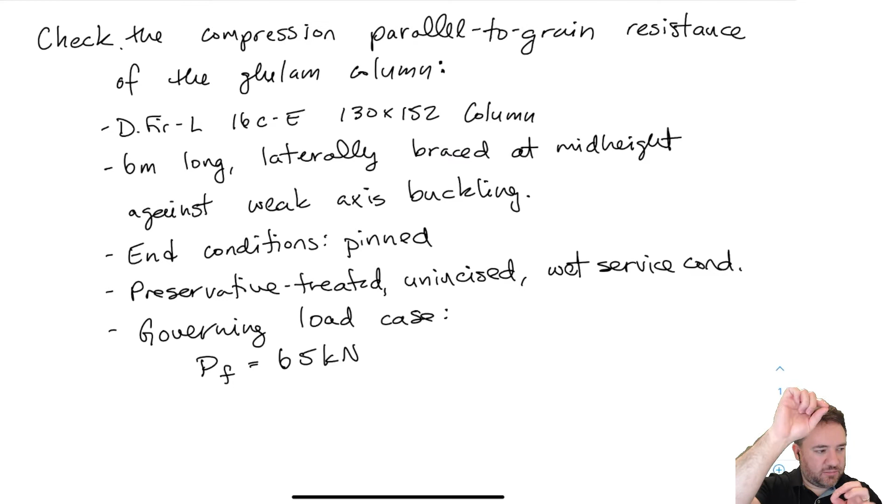All the data is here, but what exactly we're going to be looking at: we are given basically the column geometry, the column species, and the column grade. We have a 6 meter long column, and at the middle of that column it's laterally braced in one direction. That means there's some beams maybe framing into this column, preventing the column from buckling at that location, just in the center. At the ends of the column we have pins, so the column can rotate in both directions. That probably just means we have some kind of regular bolted connection at the ends.

This is the most common end condition that we see in timber members. And this column is outside or in a humid area, so it's preservative treated, unincised, and it has a wet service condition. We're given the governing load case, which is 65 kilonewtons, and this load case includes dead, live, and snow loads. We need to know that because we need to know what kind of KD factor that we're going to use. And we are tasked to predict what is going to be the strength of this and whether that strength is going to be okay given the factored load that we are provided.

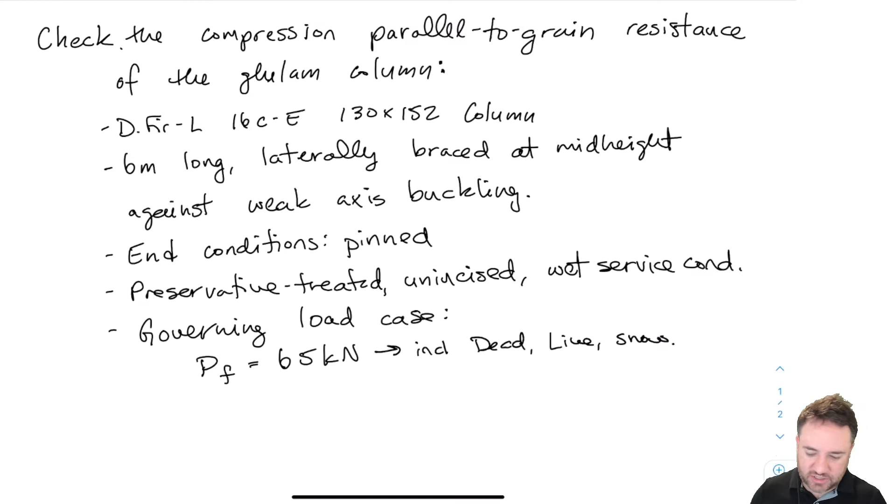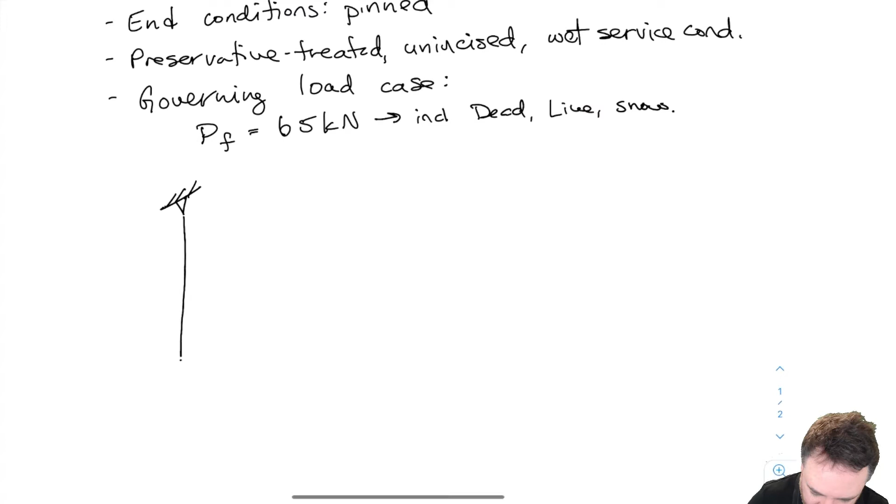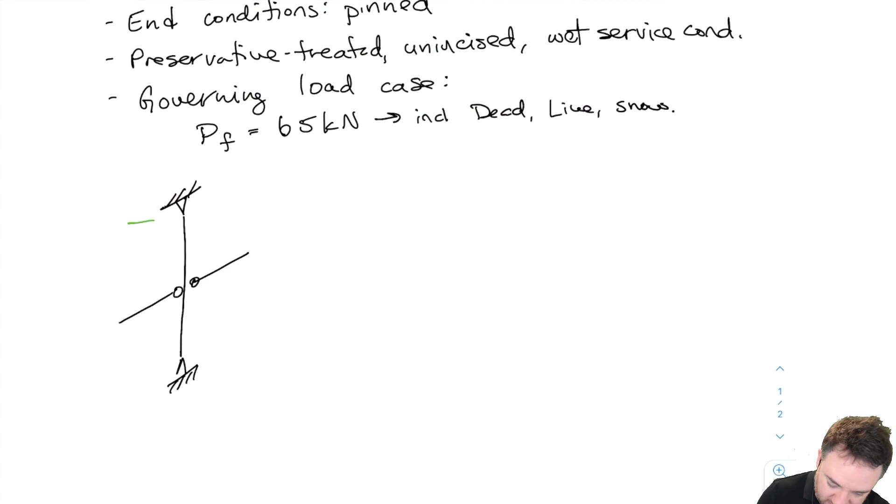Okay, so let's start by just drawing what this column looks like. As we said, we have a pin end at the top, we have our column, we have a pin end at the bottom, and then in the weak axis direction, which we'll look at when I draw a section to show what we're talking about, we have some kind of bracing preventing the column from buckling in that direction. This is a 6 meter long column, so basically we have 3 meters at the top, 3,000 millimeters here, and then another 3,000 to get to the bottom.

These are going to define our lengths for buckling in two directions. In the weak axis direction, our buckling length is going to be 3,000. And it turns out that our effective length is also going to be 3,000 because the K is going to equal 1 for that case. For the strong axis direction, our effective length is going to be 6,000 because the K is also 1 for that case, since it's pin-pin.

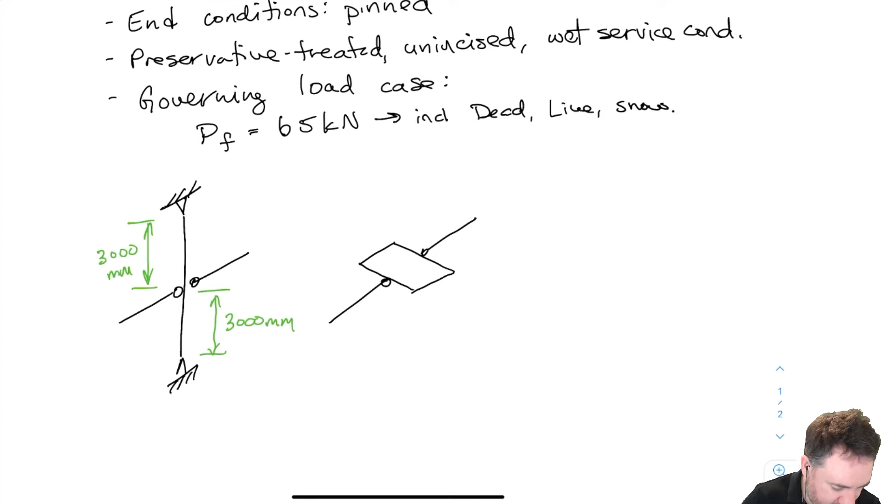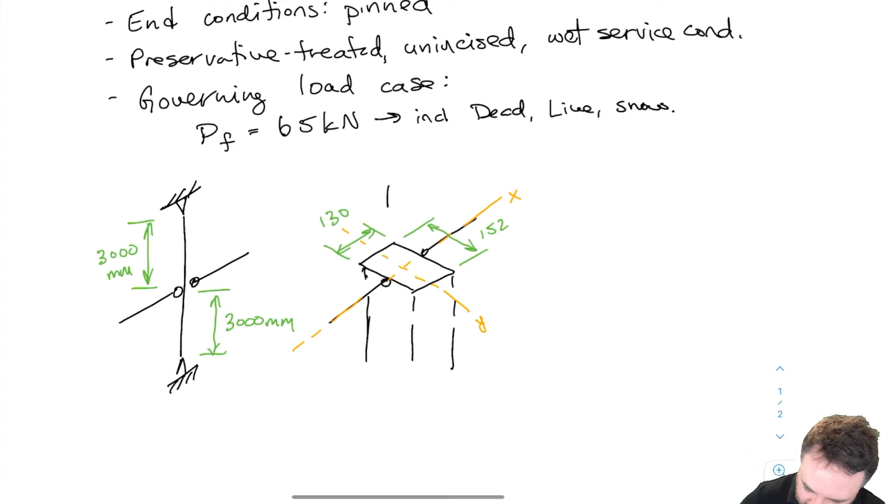So if I were to look at the cross section of this column, looking from above, or the cut section in 3D, it's going to look something like this. That is the cross section, oriented the same as I've oriented the column on the left. Here we have the bracing for the weak axis direction. If I were to label those axes, I might call this weak axis direction Y, and buckling about Y, and this direction X. But really, I'm just going to refer to these as weak axis and strong axis because I think that's probably clearer. We also have dimensions for this: this weak axis direction dimension is 130, and the strong axis one is 152. Obviously this column continues down from here. I'm just looking at the section at the restraint. I'll make these lines a little bit more obvious for the notes.

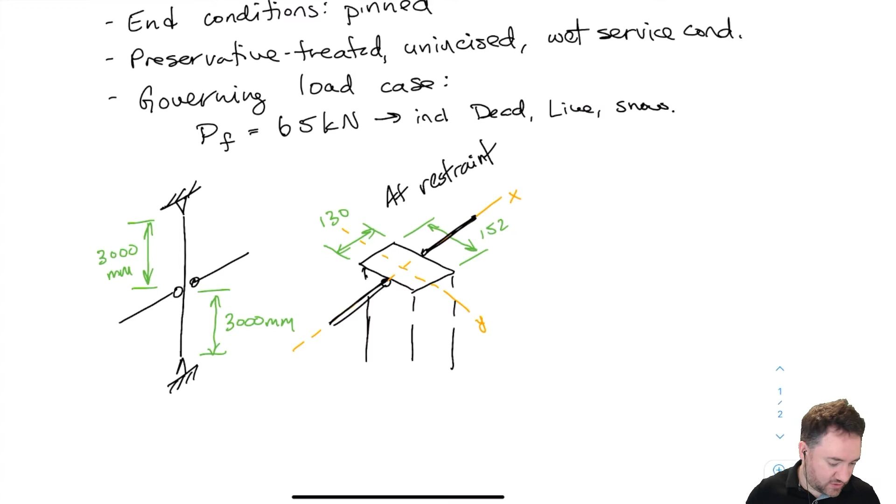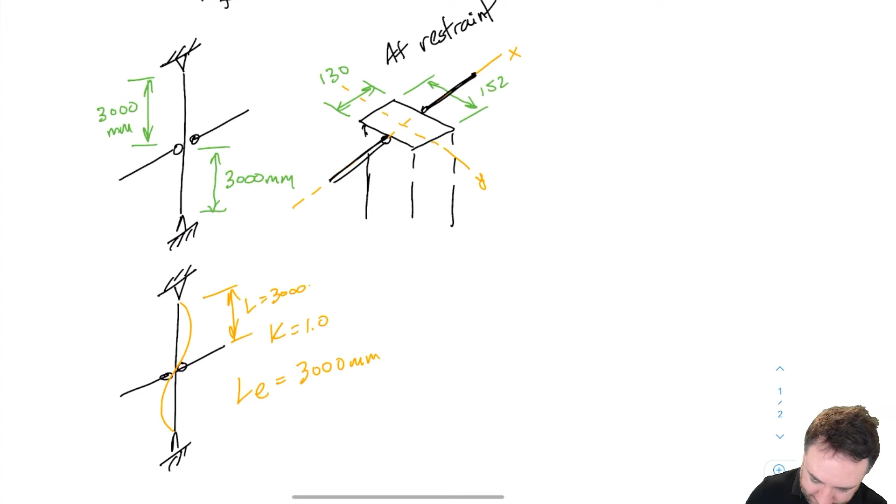Okay, so this is what's happening here. Let's get started with figuring out what those buckling lengths are. For the weak axis, our buckling shape is going to be something like this. The length is 3,000, and it's the same top and bottom. If it was different top and bottom, then we should check the more slender one. The K is going to equal 1.0 because this buckles in like just a single curve. You can go back to the video where we talk about figuring out what the K value is, the effective buckling length factor. That means that our LE is going to be 3,000 millimeters. So this is for weak axis buckling.

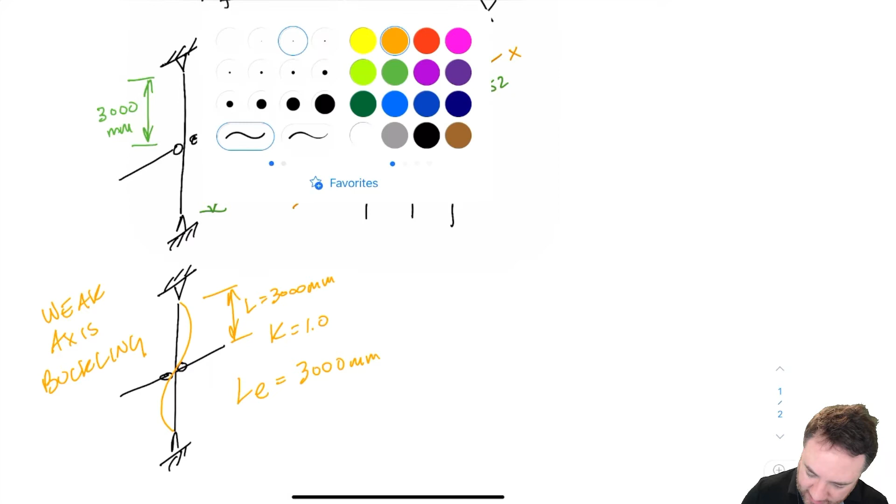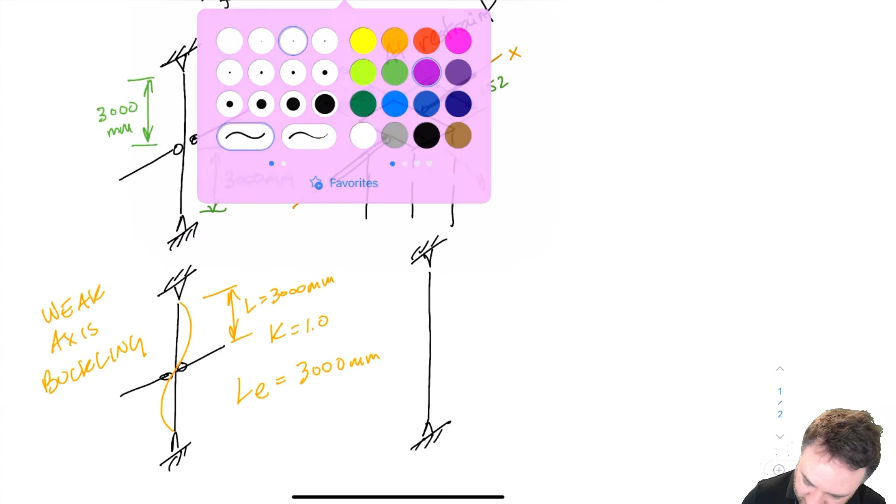Now if I look at the same thing in the strong axis direction, for strong axis buckling, we're basically buckling out of plane or into the plane. This length is 6,000.

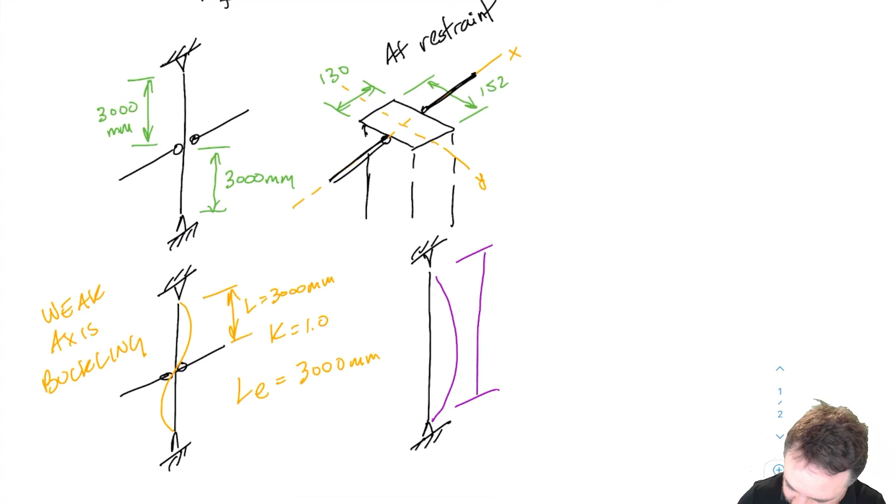My K is still going to be 1.0 because this is like a pin-pin buckling case. So you can look at the table in the appendix of the standard. Let me remind you what table we're talking about here.

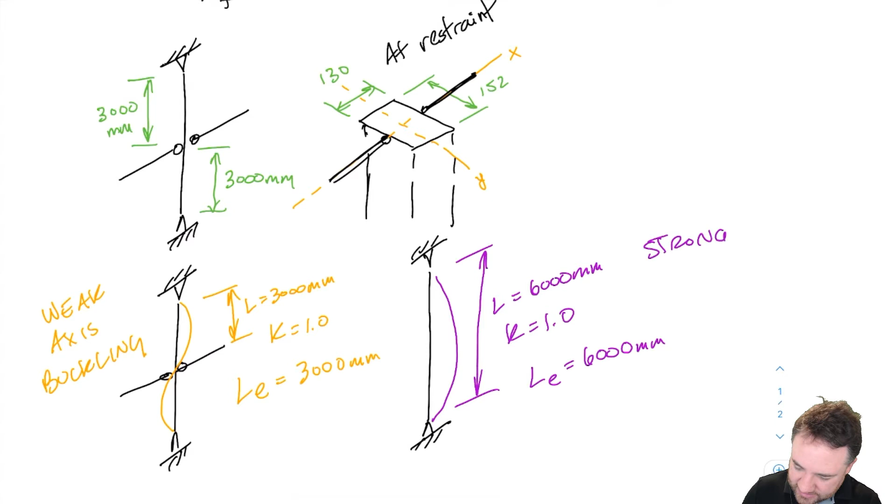Here you can see that both of these cases look like this third case here, where I have just a single curvature kind of buckling. That means my LE is going to equal 6,000 millimeters. This is for strong axis buckling.

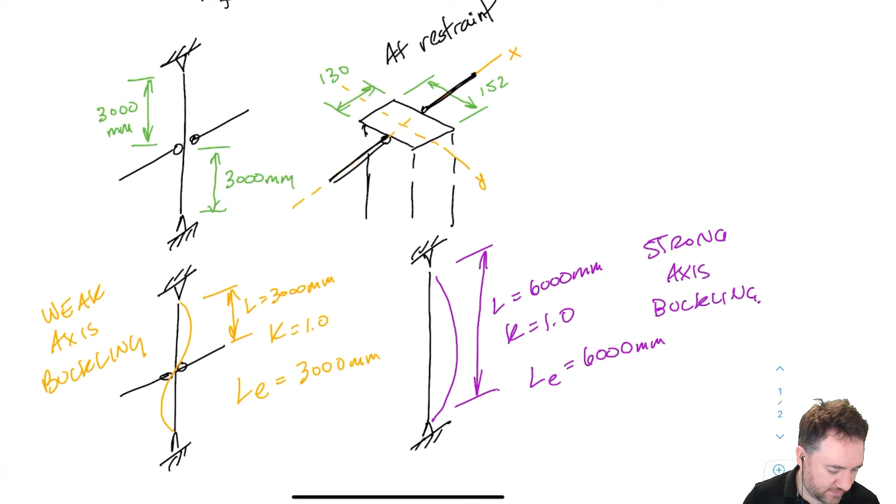Okay, so we figured out our LE for both directions. Now let's review what are the governing equations for calculating column strength.

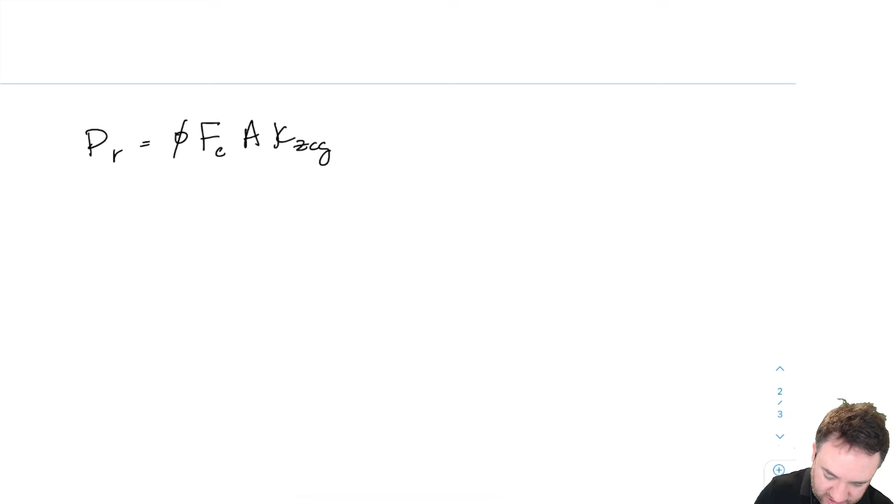We have PR equals phi capital FC A KZC. For lumber, it just says KZC, and for Glulam, it says KZCG and KC, which is my slenderness factor. We can start figuring out what these are.

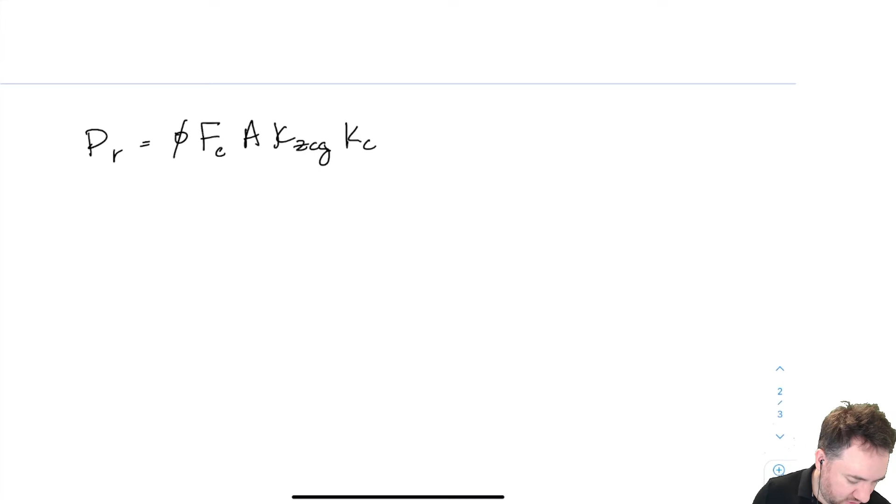First of all, my FC is small fc times KH, KST, KT, and which one am I missing? Size effect, no. Treatment. And KD, obviously. Okay, you'll get used to that.

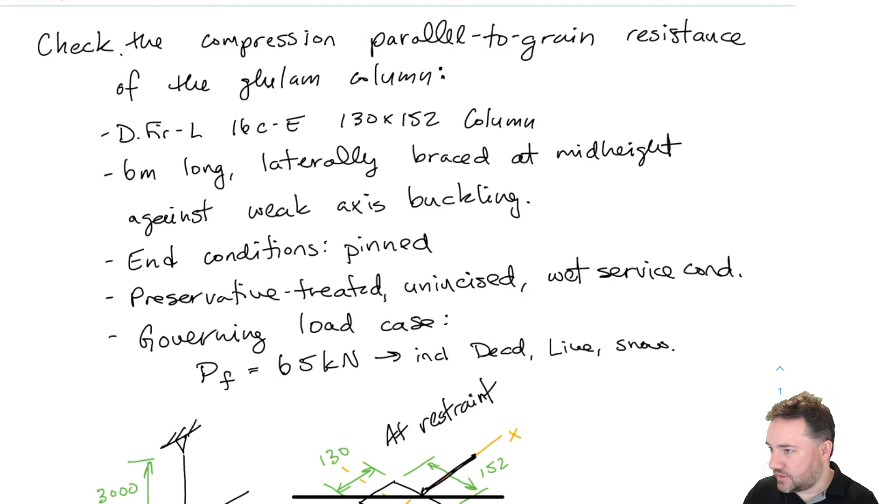Okay, so let's find all these. FC we get from our table, depending on our species and grade. So our species and grade here is Douglas fir larch, 16 CE. If I go to my table 7.3, which gives me all the strengths, I'm talking about Douglas fir larch, FC, which is compression parallel resistance, and 16C-E grade.

So my compression parallel strength is 30.2. That's my unmodified strength. So this is 30.2.

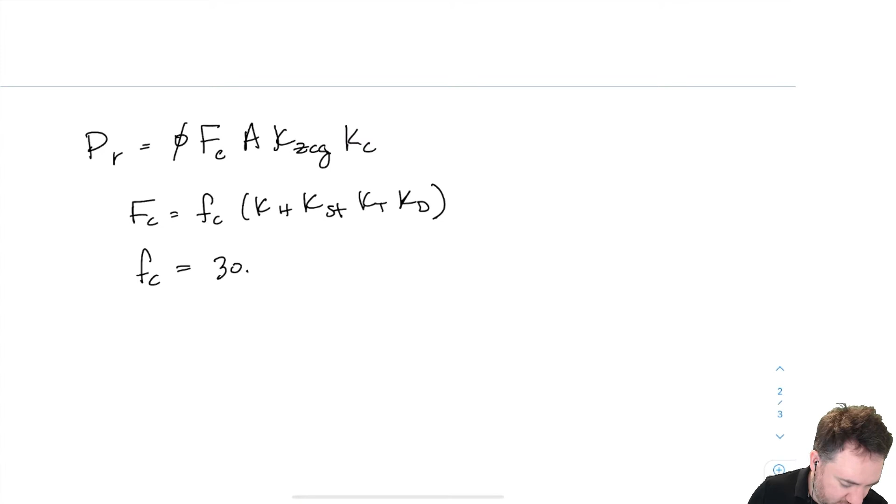My KH is going to equal 1.0 here because I don't have more than one member supporting the same load. I need at least 3 for KH.

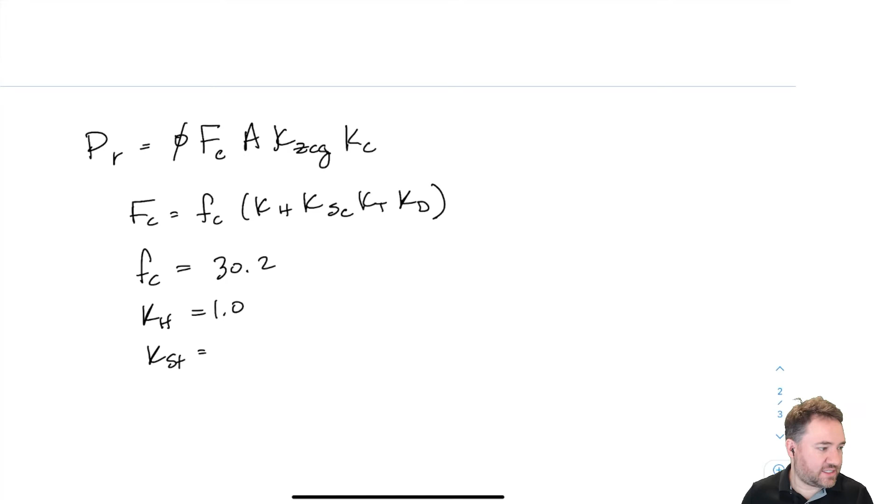KST, I'm going to find from a table because we said this is wet condition. So we're having wet condition, unincised but treated. So we have KSC - oh I have a little typo, it should be KSC, which is compression parallel to grain. For wet service conditions, that's 0.75. So this is not KST, that's what it is for tension, which was the previous example. This is KSC, and this equals 0.75 from our table.

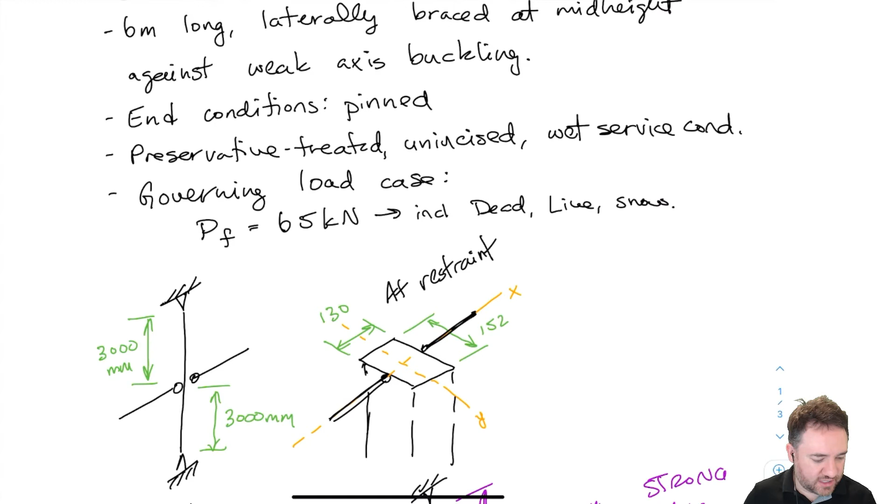KT equals 1.0 because we're talking about Glulam. And KD here is going to equal 1.0, because we're dealing with dead and live loads. We're not given any indication if the dead load is larger than the live load, but let's say for sake of argument that this is just a regular case where the live load is greater, so we don't have to do that interpolation. So KD equals 1.0.

All right, so now I can calculate my FC, right? 30.2 - I should put some units on here, this is MPa - 30.2 times 1.0 times 0.75 times 1.0 times 1.0.

Now you'll notice if you go to the standard that I mixed up the order of these compared to what's in the standard. Usually KD comes first. But anyways, I'm going with the order that I had. It doesn't matter as long as you make sure to include all of them.

So this gives us 22.6, say 22.7 MPa as our reduced strength.

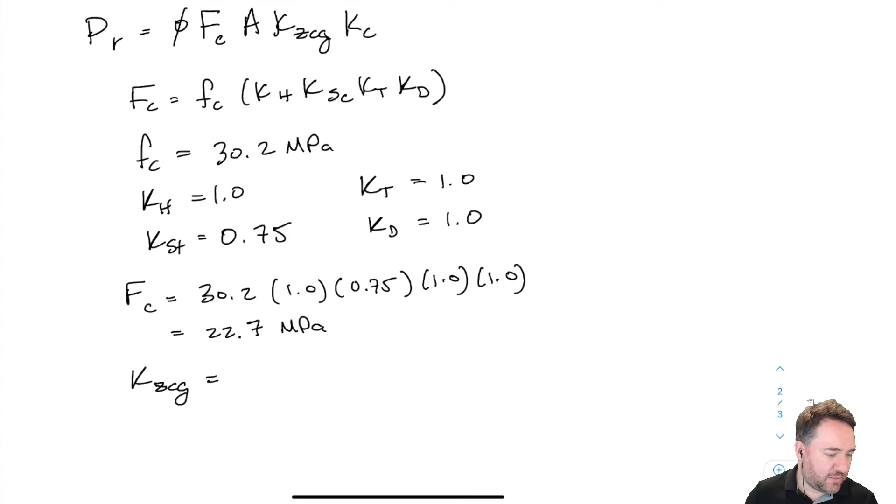And now we can calculate KZCG, which is our size effect factor. You remember, this is one of the big differences between lumber and glulam design for compression parallel. For lumber, this value changes depending on if we're talking about strong axis buckling or weak axis buckling. But for glulam, there's only one factor, which makes this whole process a lot easier. We'll see an example for lumber when we talk about built-up column sections.

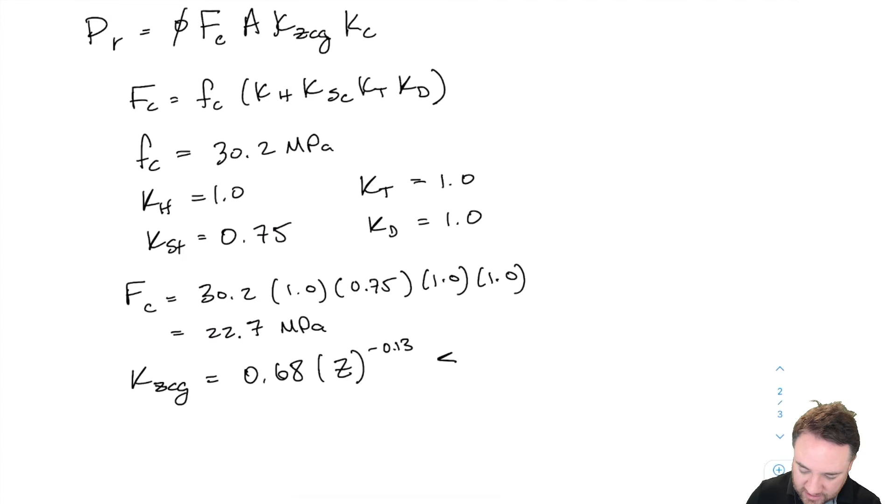So this equation is 0.68 times Z to the power of negative 0.13. You remember it's got a weird exponent because this is an empirically derived equation, and it has to be less than or equal to 1.0, and that number is a cap. So I put 0.68.

Now here's the trick. In Z, I have to remember that this is in meters cubed, so all of my numbers here have to be in meters. Otherwise I will not get the right answer, I'll get something really weird. So this is 0.13 because it's 130 millimeters, times 0.152 because it was 152 millimeters, times 6 meters, which is the length of the column. And I get 0.897, which is less than 1.0, so that's okay.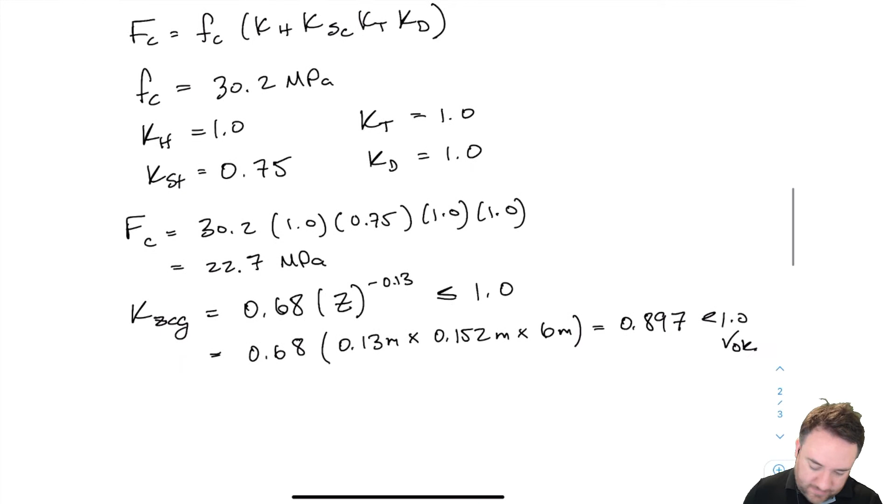Okay, and then finally I need my area, which is just my cross-sectional area, 130 times 152, and I get 19,760 millimeters squared. So now I've come up with all of the parameters in this equation, except for phi.

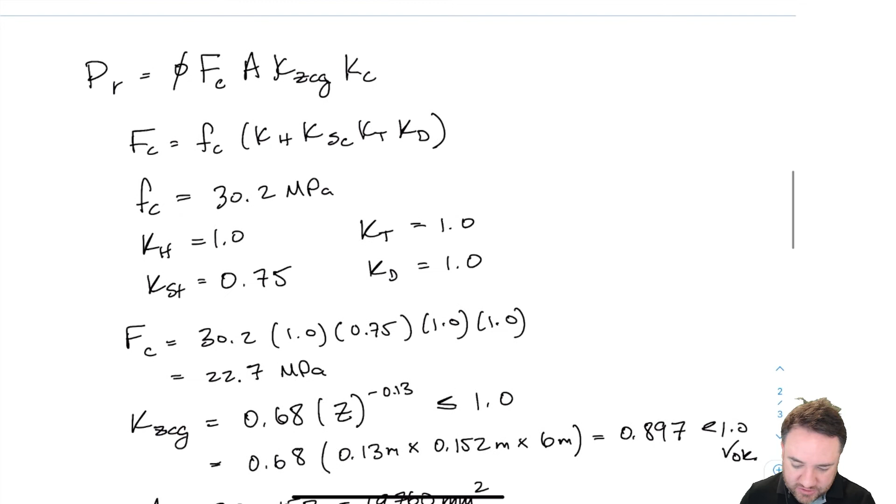Phi is 0.8, which you just get straight out of the standard. For compression, it's different than tension, right? So I've come up with all these: phi, FC, A, KZCG, and now the hardest part is finding KC, for which I have to determine the slenderness.

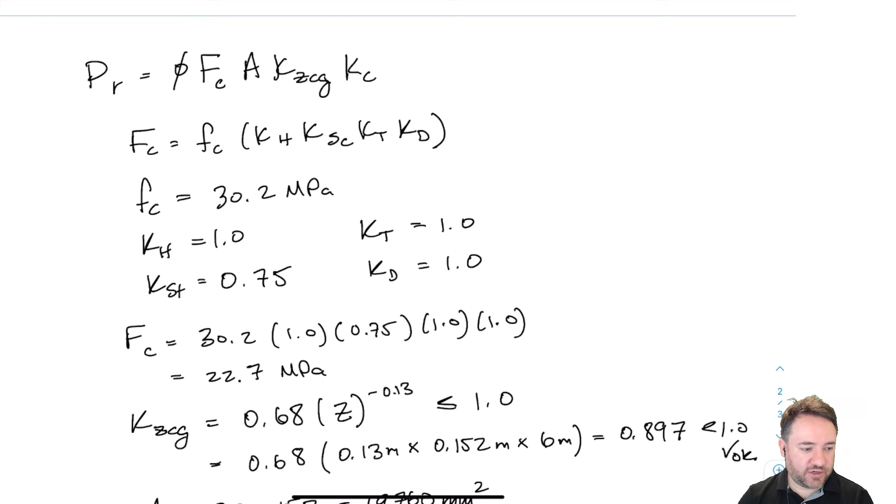This is another big difference between lumber and glulam. You remember for lumber, I check both slendernesses, but then I go through and do a whole calculation for slenderness for both the weak axis and the strong axis. In glulam, I don't have to do that. I only have to check the slenderness, only have to find the KC for the worst case slenderness. So obviously more slender is worse because the slenderer member is more likely to buckle.

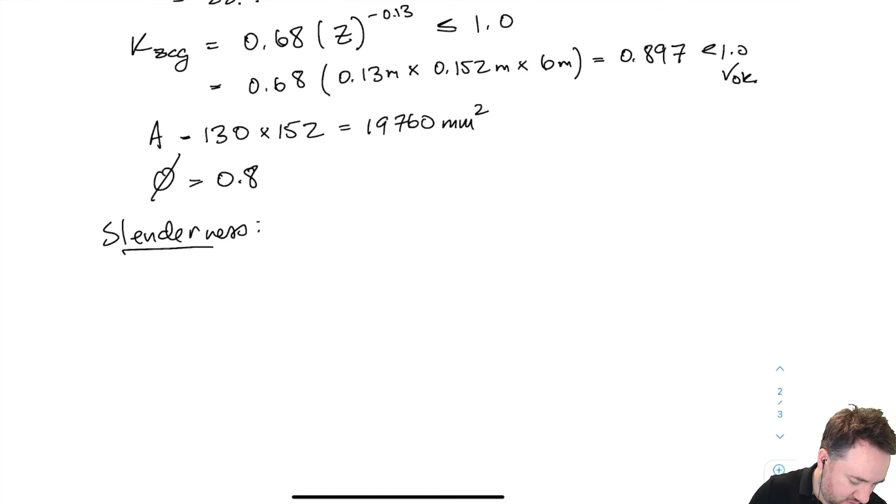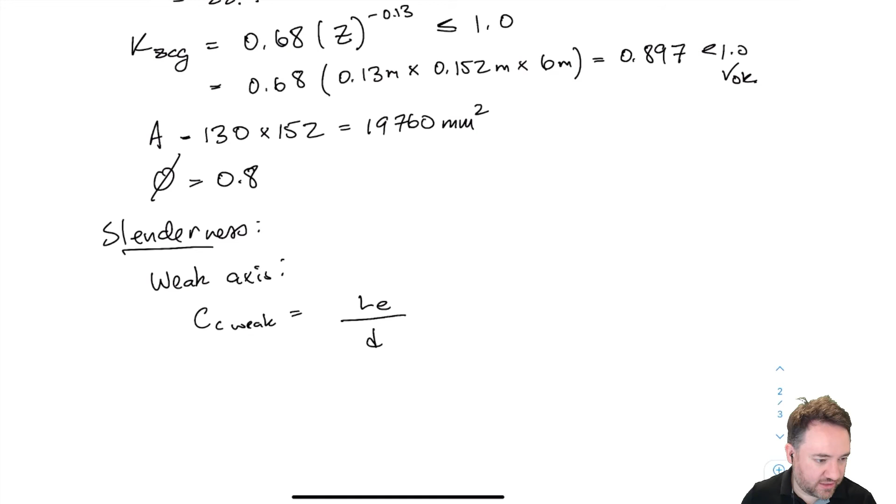So let's find the slenderness in both directions. Let's do weak axis buckling first. So weak axis, CC, I'll call that CC weak, is going to equal the length divided by the D in the direction of buckling. Here, if I'm talking about the weak axis, we remember that our weak axis effective length is 3,000 millimeters.

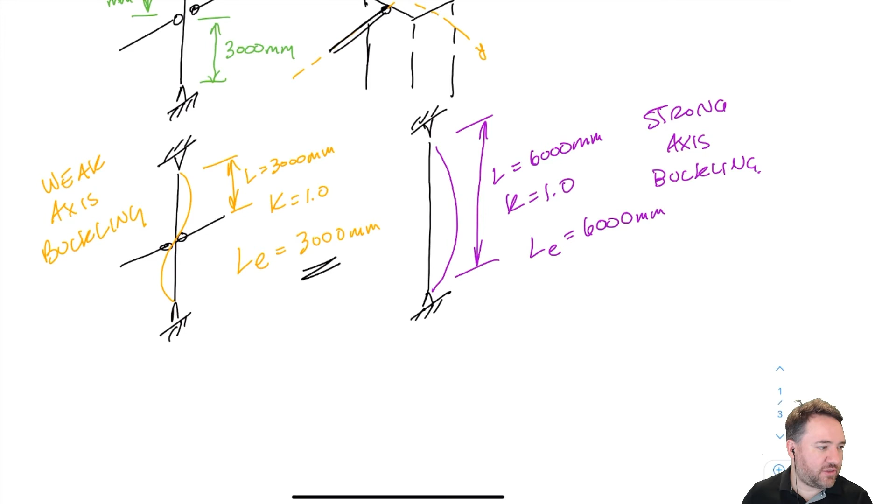And what is the dimension in that direction? It's the weak axis direction, so it's the 130. We're buckling in this direction. Therefore, that's the dimension that I use when I calculate the slenderness for buckling in that direction, because it's the depth of the member in the direction of buckling that affects how prone something is to buckling. So LE equals 3,000, and we're talking about this dimension, so we're talking about 130.

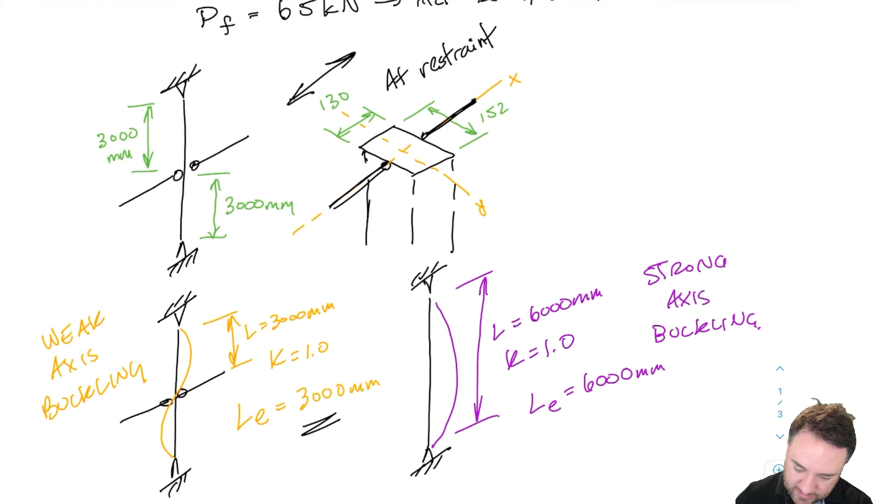So let's do that calculation. This equals 3,000 millimeters divided by 130 millimeters, right? So this is a dimensionless quantity, and I get 23.1.

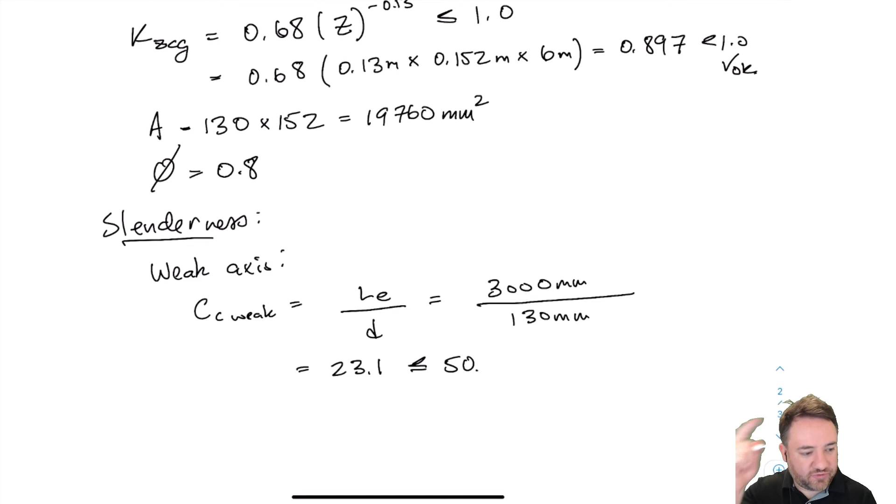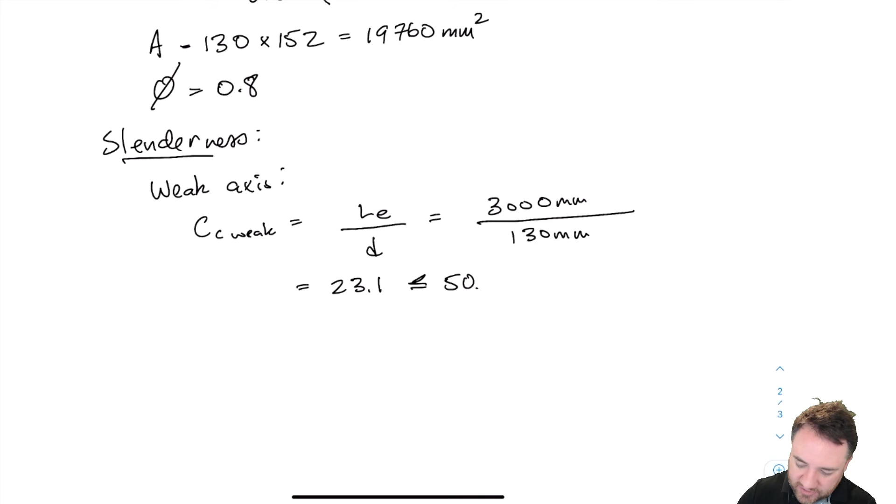And we remember that there's a requirement that this must be less than or equal to 50. And this is not a cap - it's not that if I go greater than 50, I set it to 50, which is the case for KZCG. Like for KZCG, if I get a value above 1, I just set it to 1 and cap it. In this case, you're not permitted to have a design that has a CC that is greater than 50. So we're less than 50, so then we don't need to redesign this section.

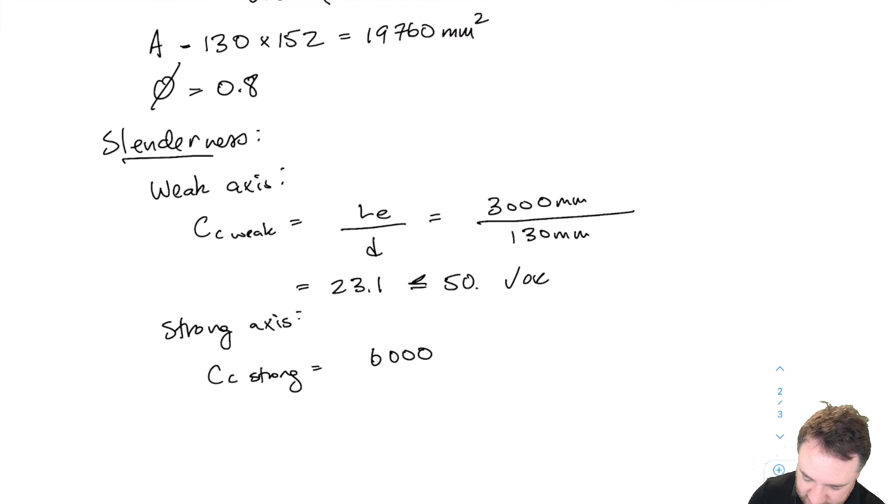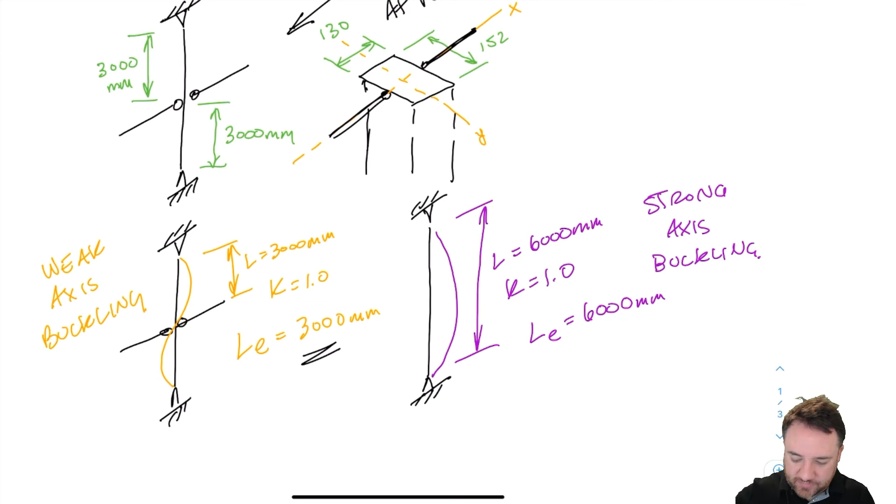So then let's look at strong axis. CC strong. Now we have our 6,000 millimeters, which is the buckling length for our strong axis buckling, which is the purple one on the right, because the restraints do not prevent the column from buckling out of plane. They only prevent it from buckling in plane, right? And the dimension in the direction of that buckling, which in this case is the strong axis dimension.

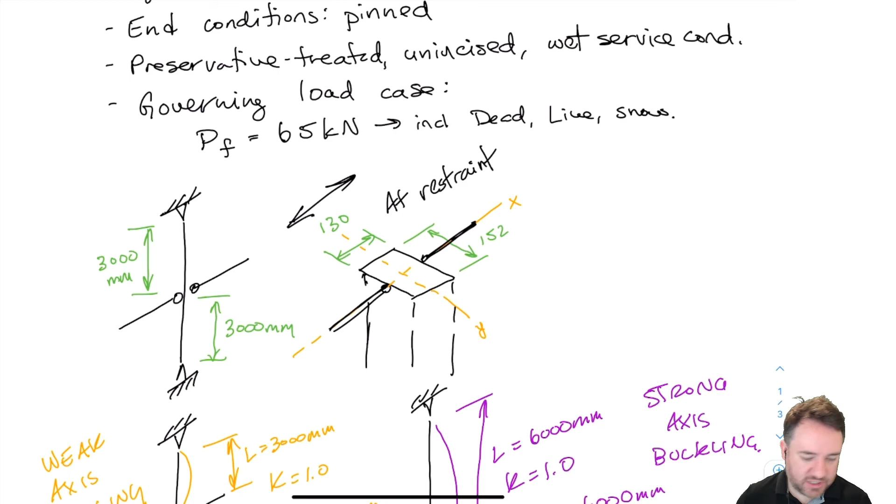So this is why I like to call it strong axis buckling, weak axis buckling, because then I just use the strong axis dimension when I talk about that - the larger cross-section dimension is the strong axis direction. And that's 152 in this case. So I'm going to put this as 152.

And what I get is 39.5, which is also still less than 50, so it's okay.

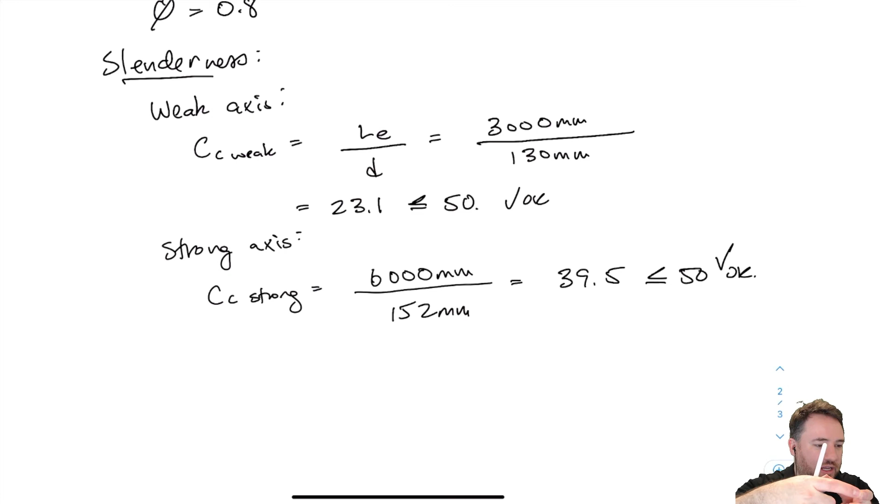Now you notice here, the weak axis is not actually the axis that's more prone to buckling. I'm talking about the weak axis of the member, not which one is more prone to buckling. So the weak axis actually is stronger for buckling. Why? Because it's restrained. Whereas the strong axis, even though it has a larger cross-section dimension in that direction, it is more prone to buckling because the buckling length is much longer.

So since we're talking about Glulam, I only have to continue with the one that's worse here. So I have CC strong as the worst one. That's the one I'm going to use to calculate my KC.

Now, again, that does not apply for lumber design. For lumber design, I have to go through and check both. Why? Because the KZ factor also changes based on which dimension I'm talking about, like based on which buckling direction, and the effect of that is reversed. So it's not clear, before you actually do the calculation, which one is going to govern. Although in most cases, it's still going to be the slenderness that governs, but it's just not guaranteed to be the case. So I have to check both for lumber.

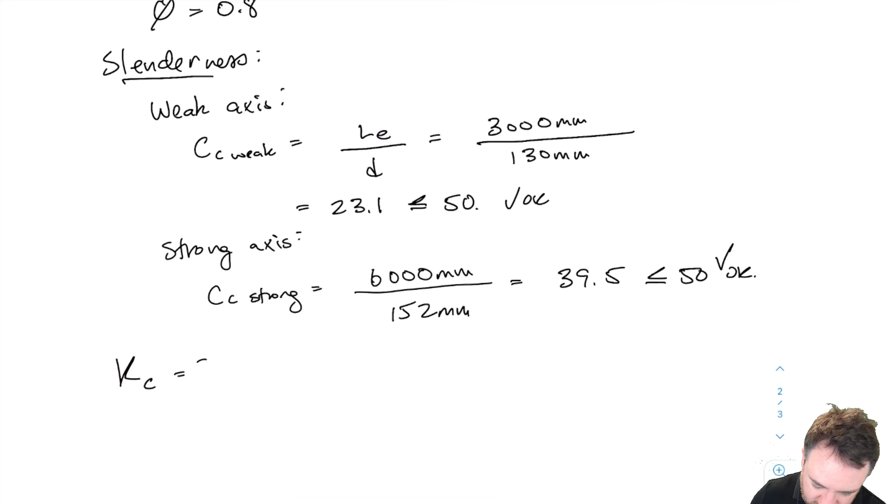But since this is Glulam, let's continue and check the slenderness factor. So I can do KC. We'll recall this equation.

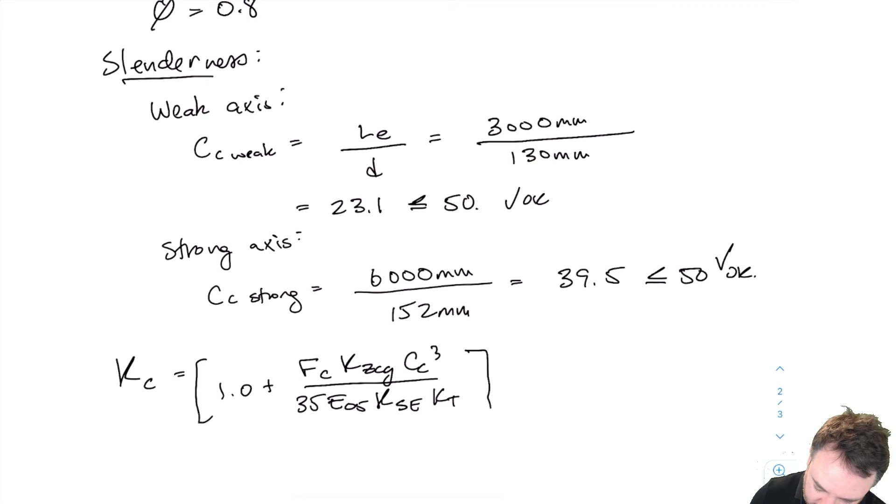KZCG, CC cubed, and 35 E05, so it's the 5th percentile Young's modulus, KSE, KT. There's a couple parameters in here that we haven't found yet. One of those is KSE and the other one is E05.

So E05, we get, and it says in the standard, we can get that as 0.87 times E. And where do we find E? We find E from our strength table.

So if I go back to that table, we're talking about 16C-E again. This is our grade for Douglas fir larch. And we read down and we see modulus of elasticity, E is 12,400.

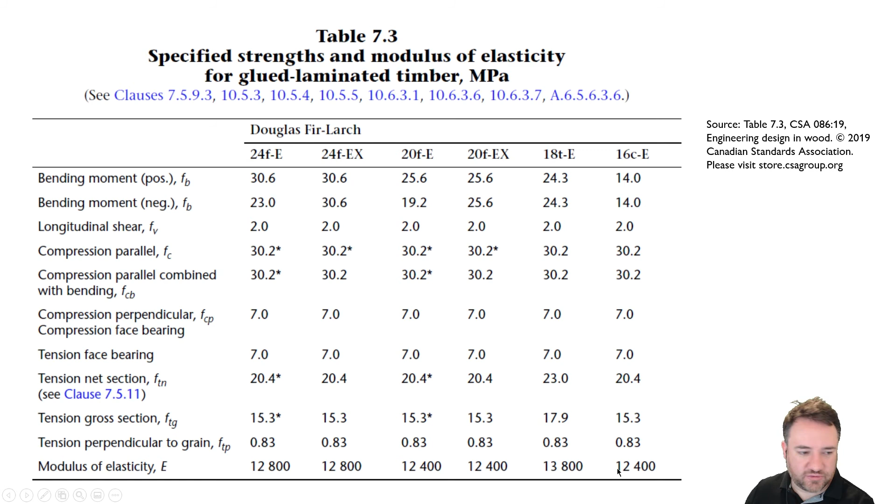So here I can fit in, I can either do this calculation or I can sub it all in together. I'm just going to keep it separated for now. 12,400 MPa.

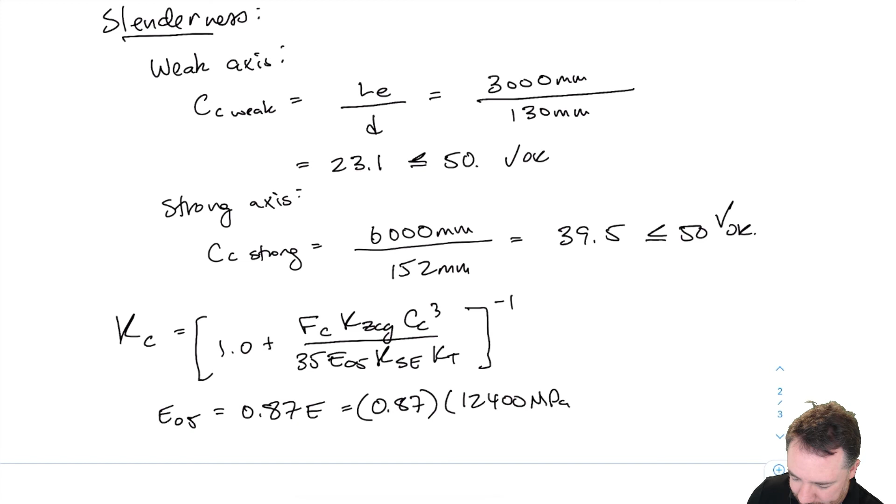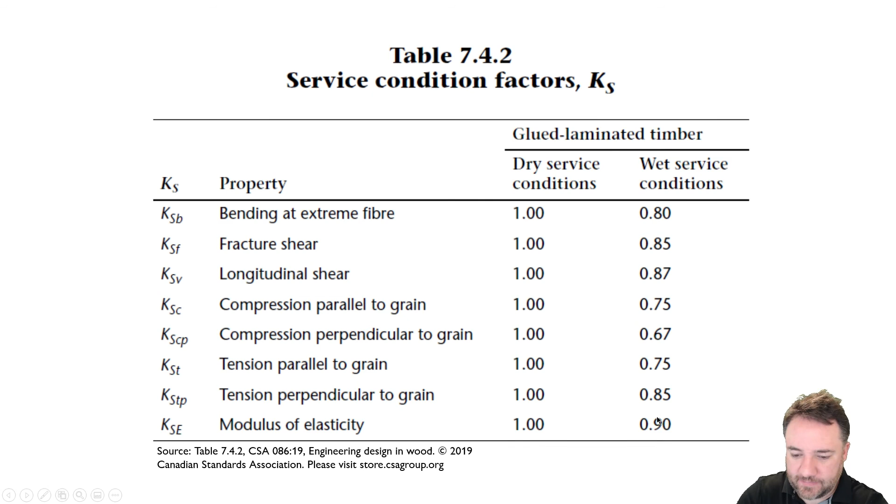Okay, and the other one that we don't have is KSE, which we're going to go to the appropriate table for Glulam service condition factors. And we see KSE, which is different than KSC. So this is an effect on the stiffness, not an effect on the strength. And we see that for wet conditions, it's 0.9. KSE equals 0.9. Okay, so now we can go ahead and fill in all these numbers.

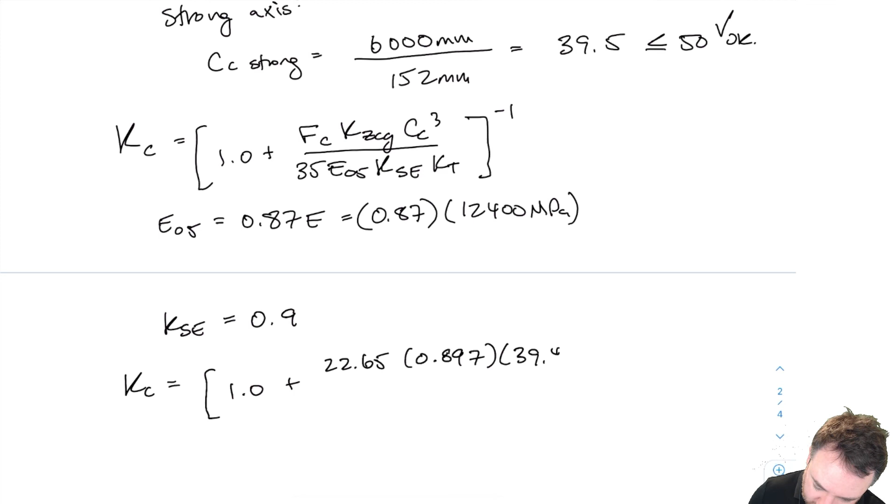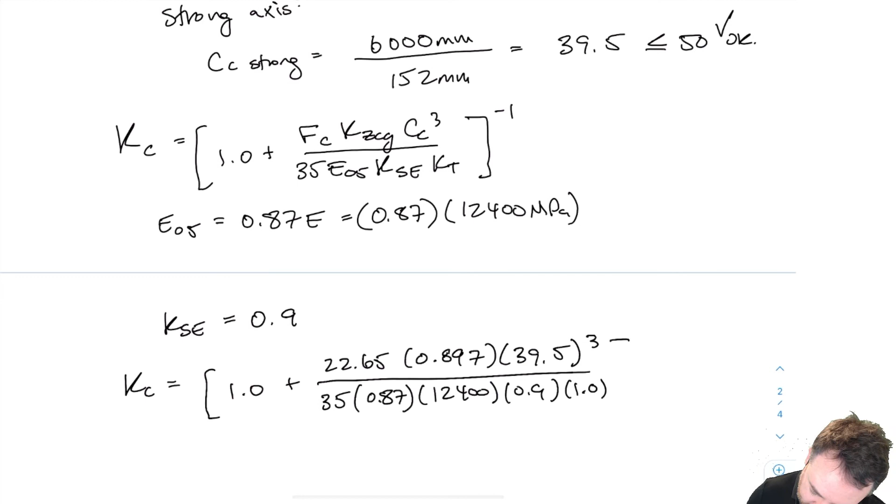0.897, 39.47, 39.5 cubed divided by 35 times E05, which is 0.87 times 12,400, times KSE, which we just found is 0.9, times KT is 1.0. We cannot forget this -1, we have to flip it, we have to take the inverse. That's an easy thing to forget.

And we get KC equal to 0.2138. So what's the consequence of that? That's too many significant figures, but the consequence is that basically I'm reducing my strength by almost 80% because of buckling. Because this is going to buckle way before it crushes in compression. So that's the price I pay for having a long column.

So now I can take all of those factors and put them back into my equation for PR. So I have 0.8, here's my FC, the one with all the resistances. Let me put the units in here, so this is MPa. We have 19,760, which was our area, so that's millimeters squared. And then we have our size effect factor, which is 0.897 up here.

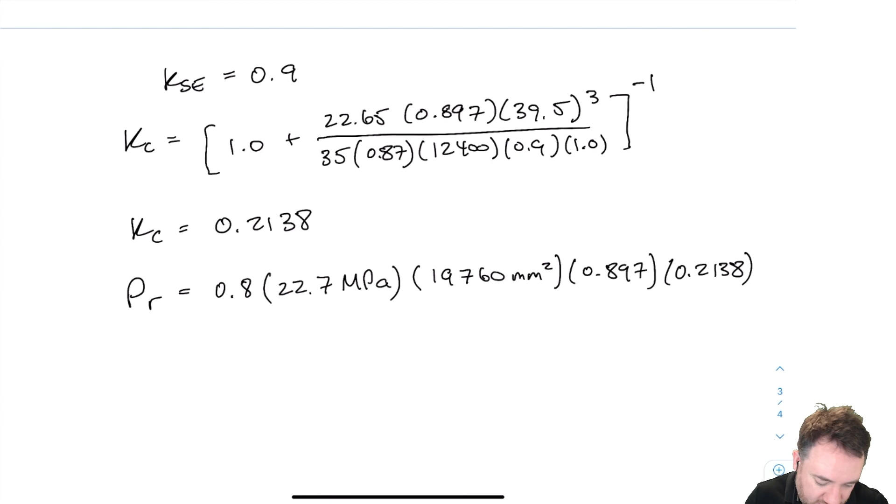And then the last one is the slenderness factor, which we just did, 0.2138. So those last two are dimensionless. The other two are MPa, which is newtons per millimeter squared, and millimeters squared. So I'm going to get a number out in newtons.

And then I'm going to divide that by 1,000 in the process of doing my calculation. So I'm going to come up with 68.7 kilonewtons. When I do that calculation, I get 68,700, but that's in newtons, so I just divide it by 1,000 to get kilonewtons. And now I can check that this is greater than my PF, which happened to be 65 kilonewtons, and this comparison is done at an equivalent KD, so the KD for both is the same.

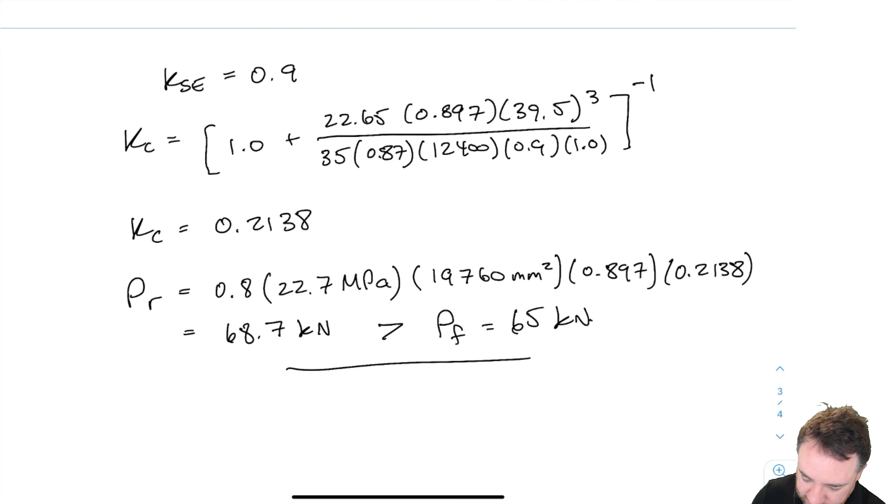And then I can say that yes, the Glulam design, the Glulam column design is adequate. And that's it. All done.